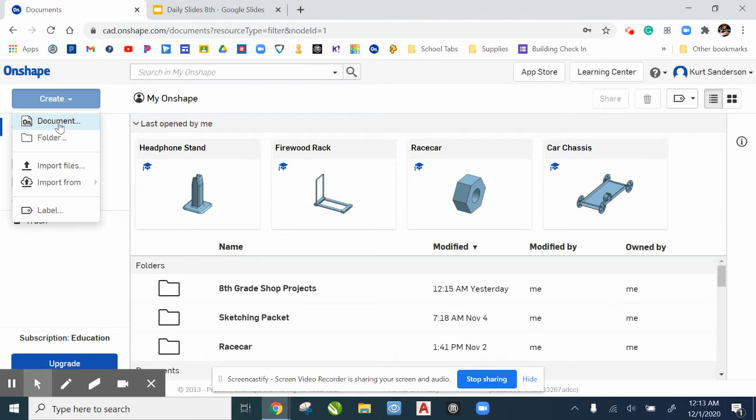All right, this is the Novice project for the original design project here. I'm going to click on Create, Document, and I'll name it Coaster Holder. You should be following along with everything that I do on your own Onshape. After I do a step, pause the video, do that step, rewatch if you need to.

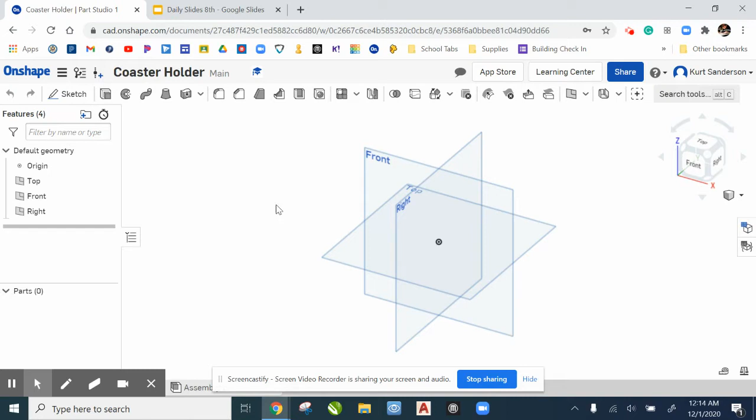All right, so I've got these coasters, and they are cylindrical coasters, and they are about 4 inches across. So I need to think about this. Let's start a sketch on the top plane. Right-click, View Normal to Sketch Plane. And since my sketch plane has been started, I can turn off top, front, and right.

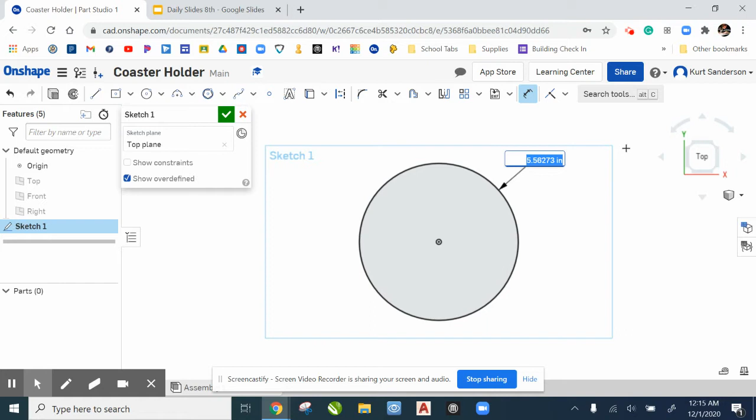Now my coasters are cylindrical, so I want to start with a circle and drag that out to something. It doesn't matter what. And then we're going to grab the dimension tool, click, and then we have to come up with something that's going to fit. So let's think about this logically. The coaster is 4 inches in diameter. I want, well, let's just start with a little bit larger than 4, about 4.25.

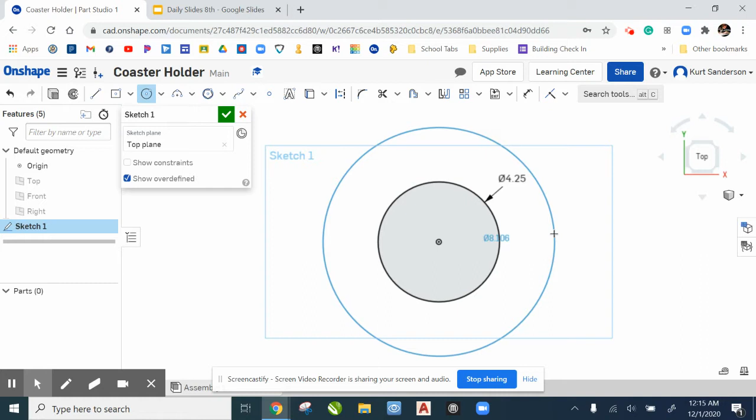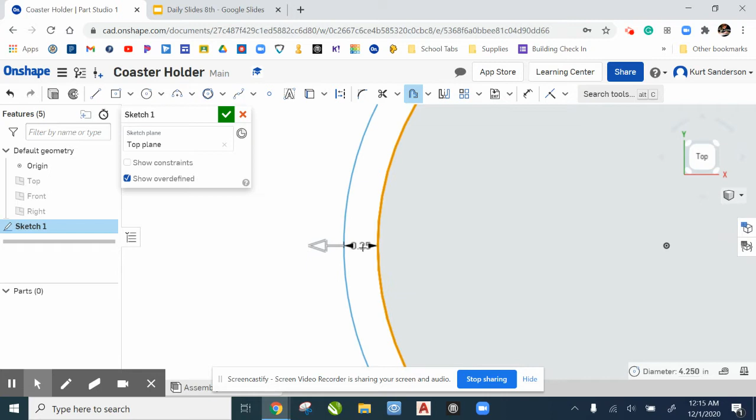That's going to work. I'm going to do another circle from the origin. Grab my circle tool, and I want this to be bigger. You know what? I'm going to escape out of that. Let's do something different. Instead of drawing another circle, let's use the offset tool. I'm going to click offset, select my circle. Make sure that your arrow is pointing outward, and it looks like it's giving me a default of a 1/4 inch. That's fine. We're going to go with a 1/4 inch, so we'll get the green check mark.

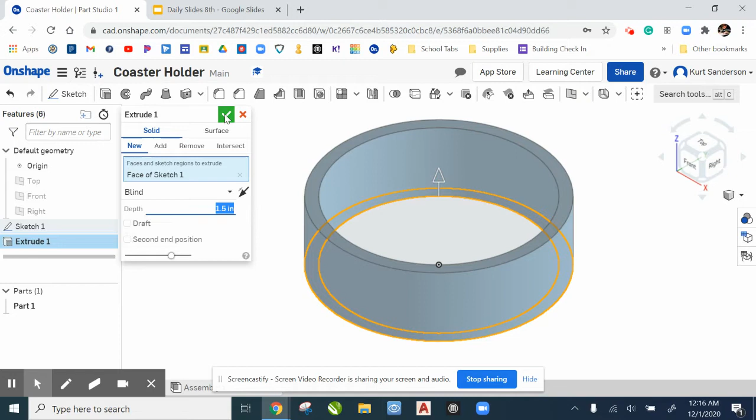Okay, we've got 2 concentric circles. Let's extrude something. Let's do the ring. And if you can view it isometrically, you can see what's happening here. How tall do I want this? Well, that depends on how tall your stack of coasters ends up being. Let's see what 1 inch. No, 1 inch just doesn't look tall enough. Let's go 1.5 inches. That looks like it'll work. We can always change it later. Green check mark.

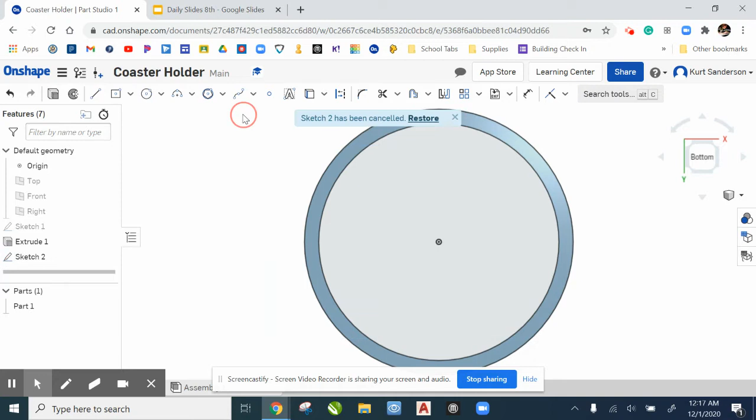Okay, let's start another sketch. We have to put a base on this. So I am going to click on the bottom face, right click, view normal to sketch plane. And I'm going to grab the circle tool, start. You know what? I don't think we have to draw this circle. I changed my mind. Let's X out of this. And let's see if we can just extrude. No, we can't. Shoot. Okay, we're going to have to select a sketch and select the bottom face of that ring. Right-click, view normal to sketch plane.

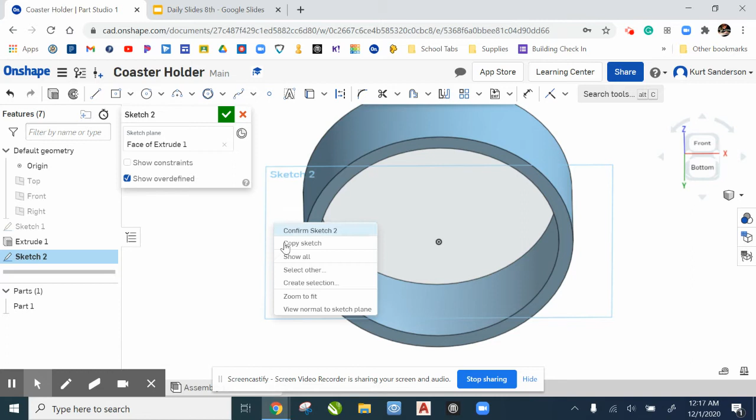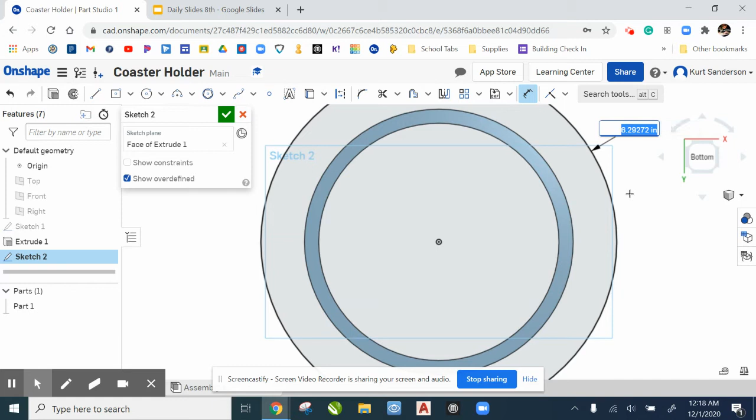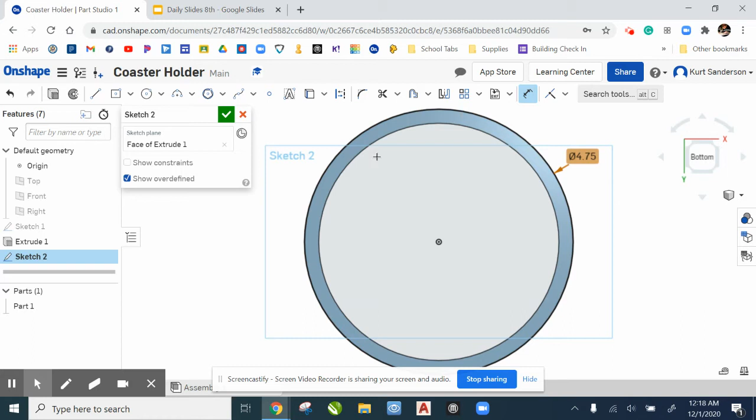We're going to draw a circle from the origin straight to the right. Let's just make it bigger than it needs to be. And we're going to dimension that size to, what was the inner circle size? 4.25? So we're going to make this 4.5. Nope, that's obviously not right. We're going to double click on that. We need that to be 5. Okay, it's definitely not 5. It must be 4.75. Perfect. These are all things that any designer would encounter. Errors along the way. Let's green check mark.

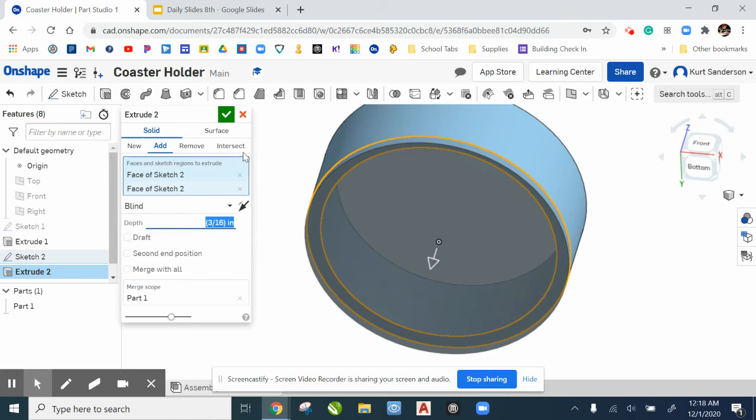Let's rotate down a little bit and extrude. We're going to have to click the ring and the middle, because we want it to be solid, and we want the base to be, how about 3/16. Be a nice thin base. Green check mark and isometric. All right, excellent. Let's start a new sketch.

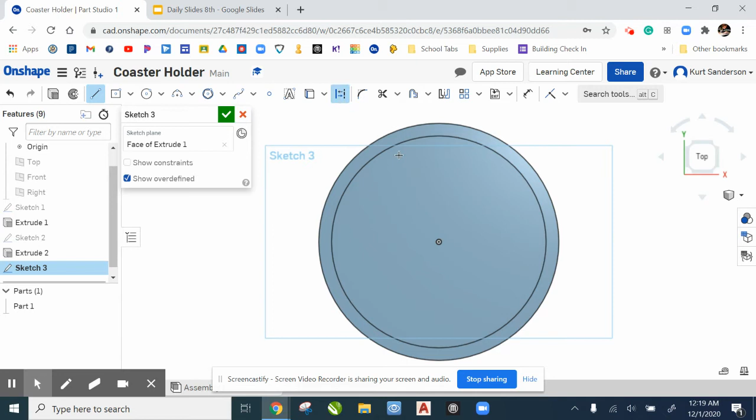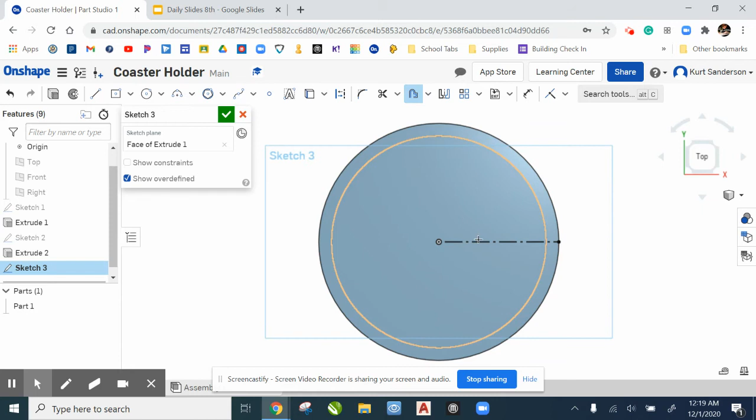Click on the top plane here. Right click, view normal to sketch plane. And let's draw a construction line. We're going to select the line tool and then click construction. I'm going to click on my origin and let's just stop it at that quadrant and escape. Okay, we are going to offset this. Let's click on the offset tool, select the line. Wants to go down, and that's fine.

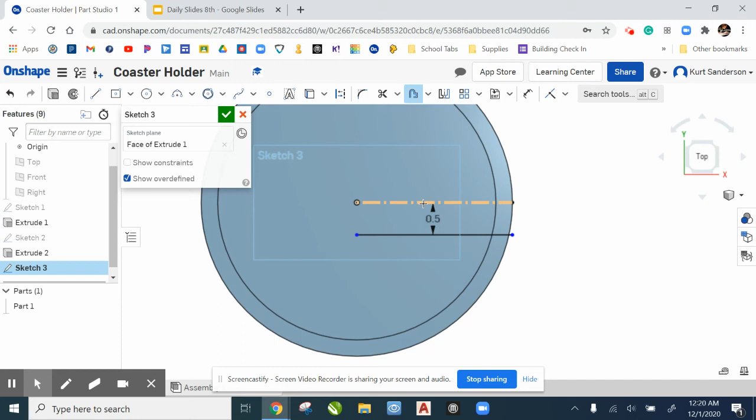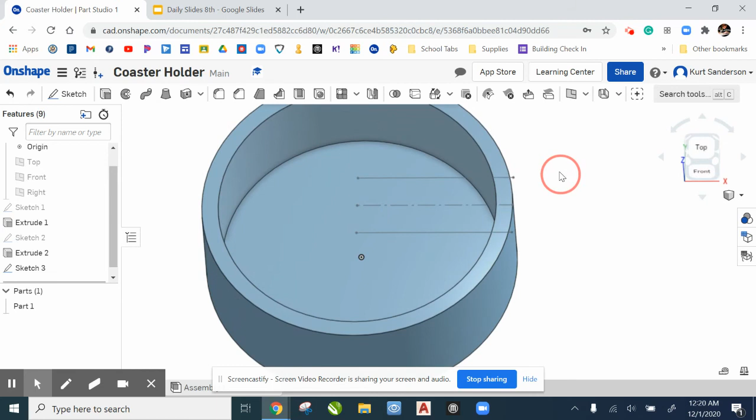I pressed enter, and that's letting me choose the distance. Let's say 1/2 inch for the distance. That looks good. Okay, and I'm going to click on the construction line again. I don't want to go down, so I'm going to click on this arrow to switch the direction, enter, and 0.5 enter. Perfect. Okay, let's see if it lets me extrude that. Extrude. Yes, it does.

Okay, I'm going to click on that, but I don't want to add material. I want to remove material. And I want to go down, up to the next surface. That's not it at all. I want it to stop extruding to here. So let's just try something else. Up to next face. Nope. Up to part. Nope.

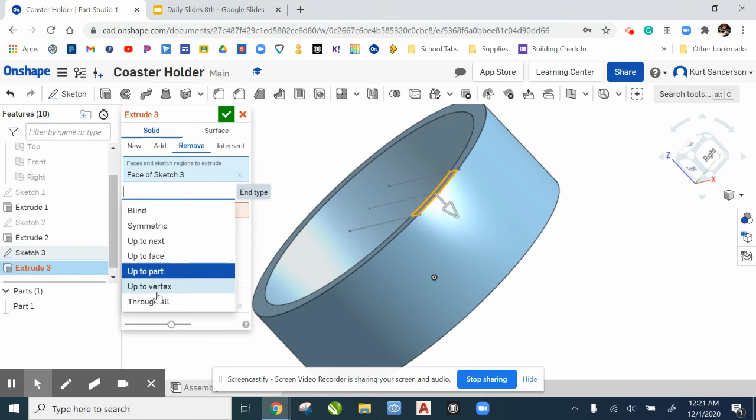Okay, well, we're just going to have to do this the old-fashioned way. The thickness we originally made this was 1 1/2. So let's do that. 1.5, enter, check mark, and that is beautiful. Okay, I can stack my coasters in here, no problem, and I can grab them out from this channel.